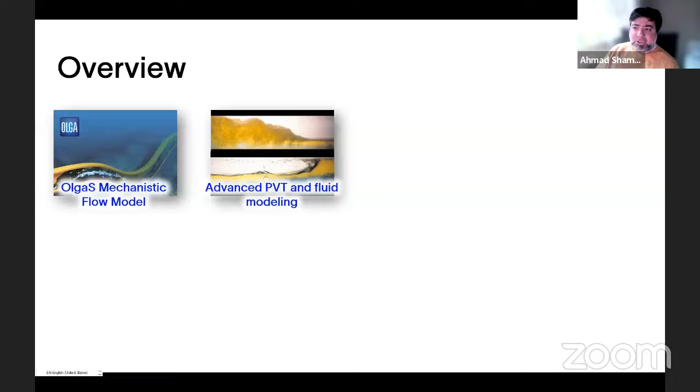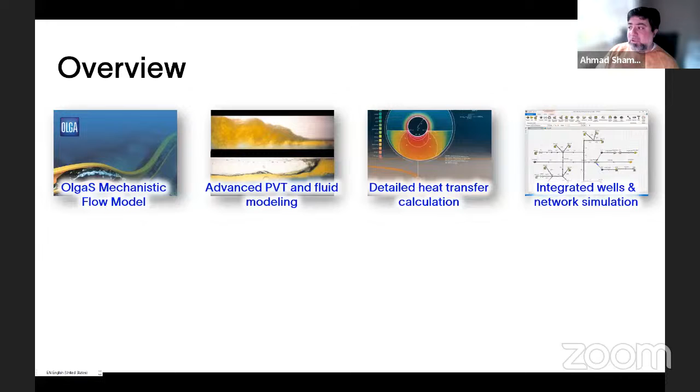Pipesim has the OLGA-S mechanistic flow model, which is the industry standard flow model for modeling multiphase flow today. It has advanced PVT and fluid modeling capabilities, including integration with Multiflash. SLB has a fluid package from our process simulator, which is Symmetry. Pipesim offers detailed heat transfer calculations in pipelines as well as in the wells. We have integrated wells and network models, and I will have a slide talking about that.

And there is, I would say, a misconception about Pipesim, probably from the name. It starts with pipe. However, Pipesim is a complete solution for modeling the production system, starting from the sandface all the way to the gathering manifold, which means that it is very powerful for modeling wells with all their granularities, design, optimization, etc. And today's presentation, the advanced well editor for modeling smart well completions, is an extension of what we have done over the years for well modeling.

We have a unique feature, which is the integrated GIS pipeline profile, in which you can build the pipeline network automatically from a GIS, or Geographic Information Systems, shapefile, and then you can also visualize the results. I'll also talk about that in a moment. We have what we call network production optimization, and extensibility and automation.

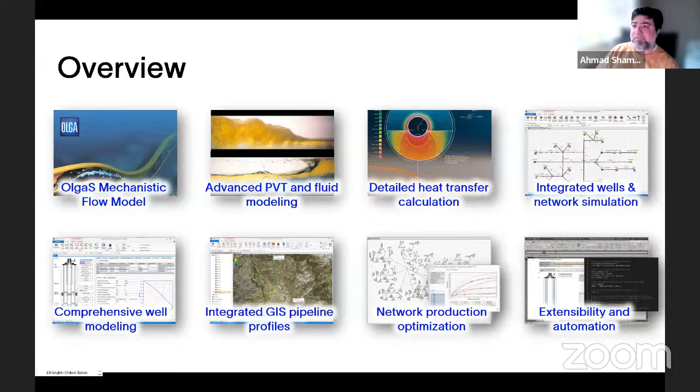Before I continue, I know that CO2 right now is a hot topic everywhere. I'd like to emphasize that Pipesim for modeling CO2 transport and injection is very powerful and reliable. We have recently compared Pipesim with experimental lab data. CO2 transport modeling in Pipesim is validated against this experimental data and found to provide highly accurate and reliable simulation results. The transition between the liquid and gas phase is handled using PH flash calculation. CO2 transport is carried out using the most reliable flow model in the industry, which is OLGA-S.

And if you're familiar with OLGA, there is an ongoing joint industry project that has been funded by several clients around the world to validate and prove CO2 transport modeling in OLGA. Every time we have a new version of OLGA-S, we will incorporate it into Pipesim, which means that Pipesim will always get the most accurate flow modeling capabilities from OLGA. For PVT modeling, Pipesim incorporates the best equations of state for modeling CO2, including CSMA, GERG, and others.

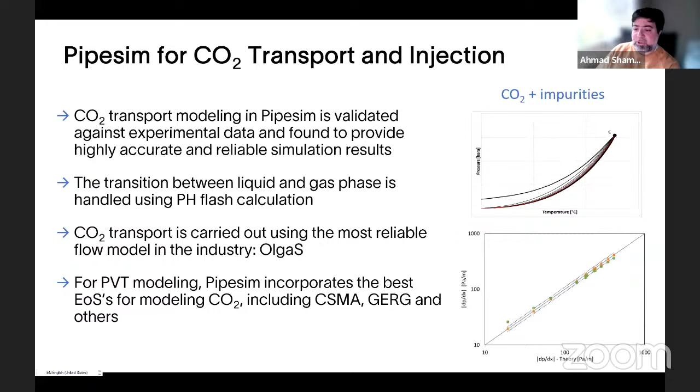When it comes to integrated wells and network modeling, you don't need separate software for modeling the wells and another software for modeling the network. In my opinion, this is a big advantage, because having one software for the wells and another for the network could result in silos between teams. Whereas when you have one integrated model, it can be shared, and in a shared environment you can open the network, update the model within the same network, and everybody can utilize the latest updated models with all the well data.

And more importantly, the simulation solves the integrated model starting from the reservoir boundary conditions all the way to the gathering manifold.

So you don't need to create lift curves in between to basically account for the pressure drop in the well. So the iteration is happening with all its accuracy from the reservoir all the way to the gathering manifold, including the well, even if the well has artificial lift or any restrictions, and so forth.

Simple model management and relatively small file size. You can have a model of 500 wells with all its pipelines, and the size is maybe 200 megabytes. And you can easily navigate from the network perspective to the well perspective by click of a button. There is a button here called perspective. As you can see, this is W for a well. You just flip it and you go to the network, and then the entire network model with all the wells will be saved in that file.

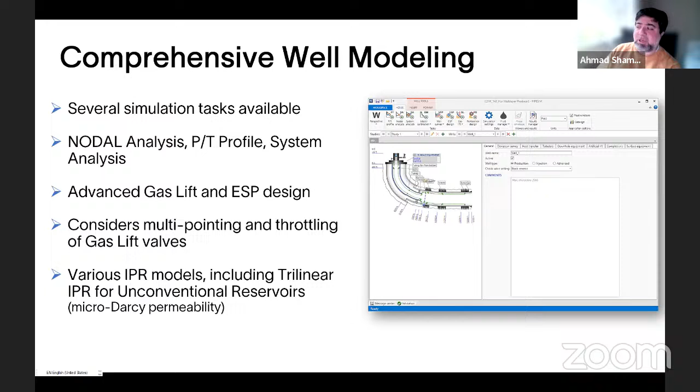Advanced gas lift and ESP design. You can completely design an ESP system or a gas lift system with all the valves. Of course, there are integrated catalogs, and you can add your own valves or pumps. It considers multi-pointing and throttling for the gas lift valves, and there are various IPR models, including trilinear IPR for unconventional reservoirs. Of course, all the standard IPR models, such as horizontal, Joshi, Vogel, all the gas IPRs, and of course the productivity index are already there in Pipesim.

So for the GIS integration, as you can see from the picture here, if you have the network, you can easily, by using the color coding of the results, identify issues and problems. For example, where is the lowest velocity ratio to look for corrosion? Where is the highest corrosion rate? Where is the maximum erosion? And where is, let's say, the highest pressure, etc. So this is, I would say, for large networks an excellent feature.

And of course, you can import a shapefile. For people who are a little bit familiar with GIS, when you go to any GIS system, the map that you see is actually composed of multiple layers, and each layer is a shapefile. So, for example, when you go to Google Maps and look into the 3D map or the actual map, not the topographical map, when you zoom in, you start seeing more data, right? And this data is actually the shapefiles. So pipelines are also stored using shapefiles.

So for mapping purposes, if you have any GIS team in your company, you can ask them to give you the shapefile for the pipelines, and you can just import it to Pipesim and build your pipeline network automatically. And of course, you can digitize on the pipeline path to build the pipeline network, and the length and the pipeline profiles would also be calculated automatically.

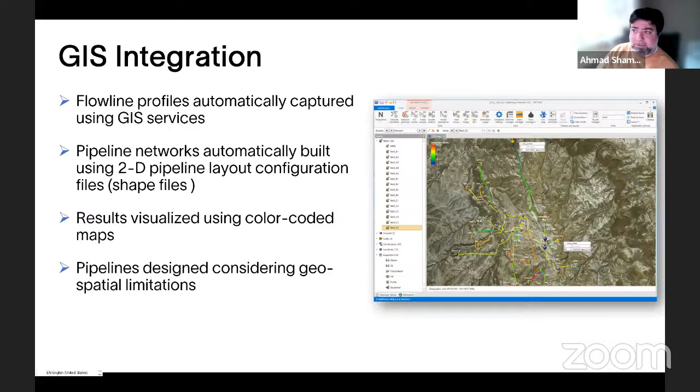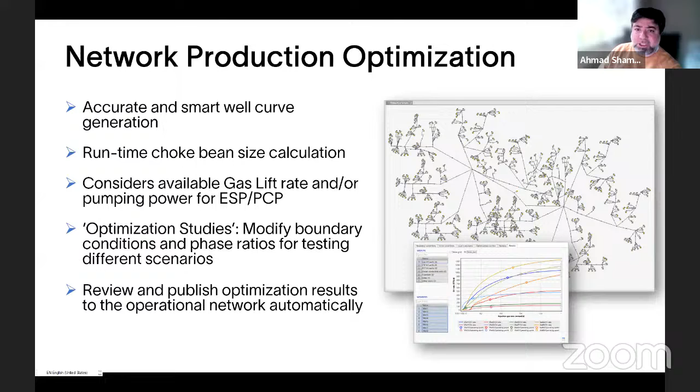And then we have finally the network optimization when it comes to the core features, in which it will automatically calculate for you the distribution of the gas lift system, for example, gas lift rates per well, the distribution of the ESP frequencies or the choke settings to maximize production and of course honor the constraints.

If you like scripting, you can actually interact with the models without really opening the user interface. So with the Python toolkit, you can build and update models using Python scripting without opening the UI. This, of course, helps you to run batch simulations and analyze the results. And it is suitable for all users with basic Python experience. So you don't really need to be, I would say, a big developer or something.

And also we have other extensibility and automation frameworks. We have a cloud native engine service API. This is what we use in what we call Delfi in SLB, which is our cloud answer. And we have a C++ API that enables linking Pipesim with third-party applications such as process simulation.

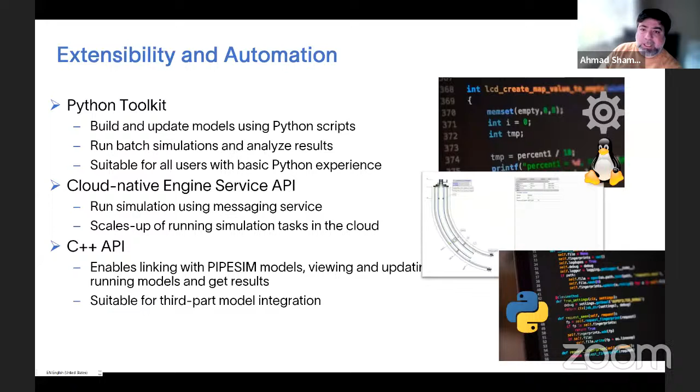Okay. So now, what are the latest features that we have implemented this year? So the big thing is really the new tab, which is the advanced well, and I will focus on this a little bit.

We are also enabling modeling flow control valves along the completions. We have a new GIS map background, and we have enabled the phase ratio override on multi-flash files.

So the advanced well. The advanced well is really a new revolutionary concept in modeling wells. I don't believe there is any other competitor that can do this today. The reason is because we are breaking down the well into nodes and branches and utilize the network engine solver.

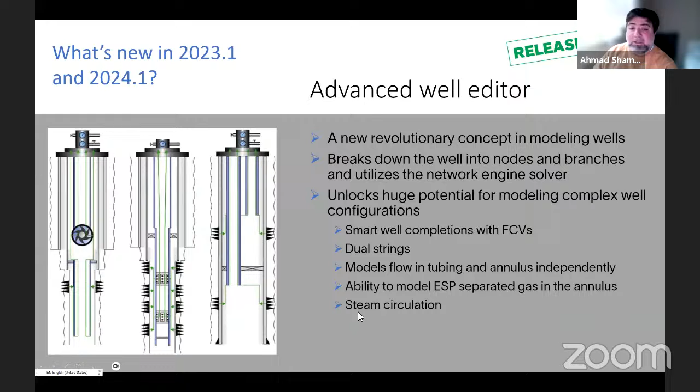So this unlocks huge potential for modeling complex well configurations, such as smart well completions with flow control valve, dual strings, modeling the flow in tubing and annulus independently, ability to model the ESP separated gas in the annulus, and also it's used for steam circulation. What is the motivation? Why did we do this?

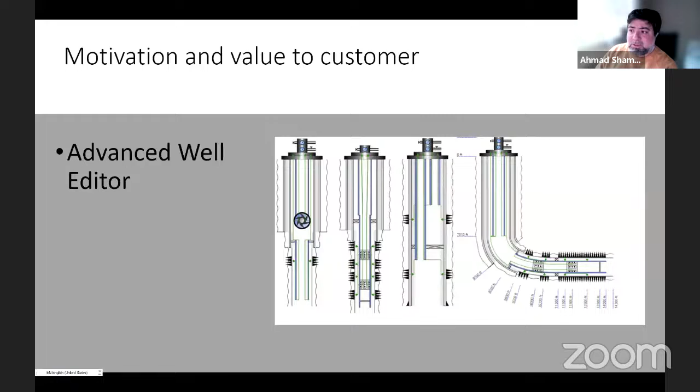Okay, so to deep dive a little bit more on what is actually the advanced well. If you're familiar with Pipesim, this is a well cross section for a well, right? In Pipesim, of course, you can model multi-layer. However, each layer has to be exactly on the same depth of a sleeve. And the sleeve really is not a mechanical sleeve. It's just to open the flow path in front of the completion.

In Pipesim, the well canvas traditionally is considered, and it must be a single branch, meaning this is a single branch from bottom up, or for injection from top to bottom. And as I said, even if I have multi-layer, this multi-layer is not really another flow path. It will add to the same single flow path.

If you're familiar with Pipesim, the moment you move the completion a little bit up or down, or you move the sleeve up or down, Pipesim will give you a warning that I cannot solve this, because then it becomes basically a commingled flow, right? And in Pipesim, we have two separate engines, right?

In fact, behind, what you don't see is that there are two completely separate engines for solving the tasks. For the wells, we have what we call the single branch engine, right? And it handles all the tasks related to the well: nodal analysis, PT profile, system analysis. All that is really a single branch engine, right?

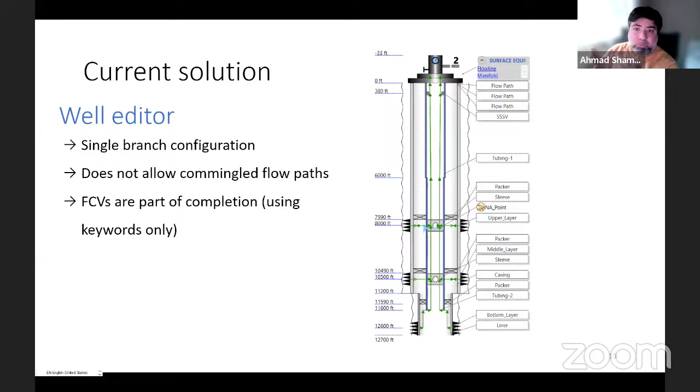It was available in Pipesim Classic, but then you can only have the flow control valve as part of the completion. It just adds pressure drop to the completion. So it's not really an actual flow control valve as we wanted it to be, right? Because the flow control valve by itself can be placed anywhere along the tubing, and the flow can go into the annulus and so on and so forth. So this well editor was limited, okay?

And we have, of course, the network editor. So some clients have used the network editor to model smart well completions. Like in this case, for example, we have a well that was developed using the network editor. This is the tubing, and then we have a flow control valve here. It's a choke actually, and then we have a lateral here.

And you can of course do that, but it is still the network editor. So it can be used manually to construct some advanced well configurations. However, it's not suitable for all the well configurations. And the problem also is that suppose you need to model an ESP, or you need to model gas lift, it's going really to be a hassle, right?

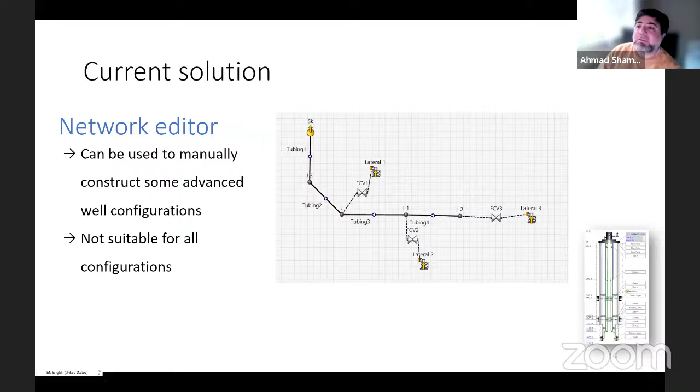So this is what we have been working on in the past 2 years. It's the new solution, the advanced well editor, where the well components are converted into an equivalent network automatically, and the network solver is used to simulate the network system. This opens doors to simulate various advanced well scenarios, such as dual string, steam circulation, smart well completion with flow control valves, and modeling of ESP separated gas in the annulus.

So for smart well completions, this is released already now. It's been released since last September.

This is a cross-section for a well with flow control valves, and I will show you a demo today, right? As you can see here, we have a horizontal well, and we have a flow control valve here. In this horizontal well, Pipesim recognized that there is a flow control valve, which means it breaks down the completion at this point automatically, and then the network that will be constructed is basically going to create a node here.

So the completion will be broken down here, and then the flow will come from the bottom to this node, and then from the top to this node, or from the right and from the left to this node. This is how the network is solved. Then the pressure drop across this flow control valve is calculated.

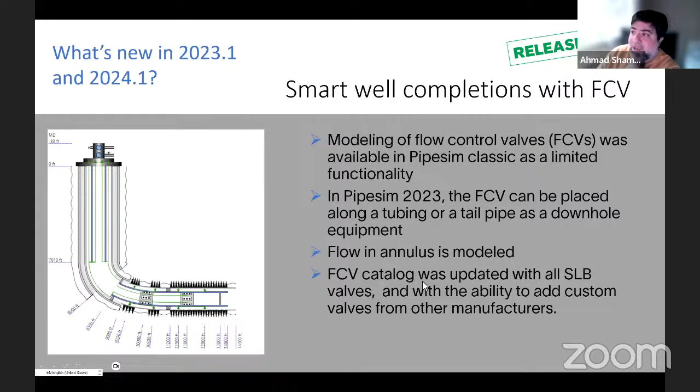So the supported scenarios: you can use the flow control valve concept for well design with user-defined or catalog equipment. You can use it for production or injection into separate zones with existing flow control valve settings. You can search for the optimum flow control valve position using the rate limit. So you can put a limit on a maximum liquid rate, maximum gas rate, maximum water rate, or maximum mass rate, and automatically the engine will tell you what the required position is, right?

Remember, this is not going to find the optimum. You just put a limit, and the limit can be on any of the valves, and then automatically the engine, based on the hydraulics and the inflow coming from each completion, is going to calculate the required opening, or the required area or equivalent area along the flow control valve.

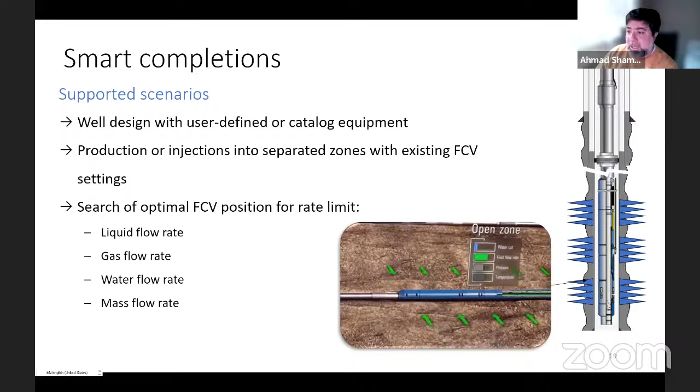So this is just to explain more how we're constructing the network, right? The same network as before, I just converted into vertical using the format, right? But you will see that we have this completion at the bottom. We have a flow control valve here. These are two single point completions. So this is a distributed completion, and these are two single point completions, okay?

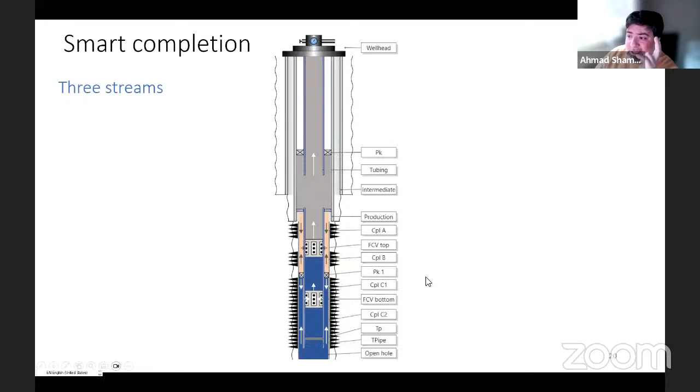You will notice that we actually have three streams, okay? So we have the flow stream in the upper zone, from this completion to the flow control valve, from this bottom completion going up to the control valve, and then across the flow control valve. And we also have this bottom zone, which is a horizontal completion. It is actually split in this location, and then the flow in the annulus is also calculated.

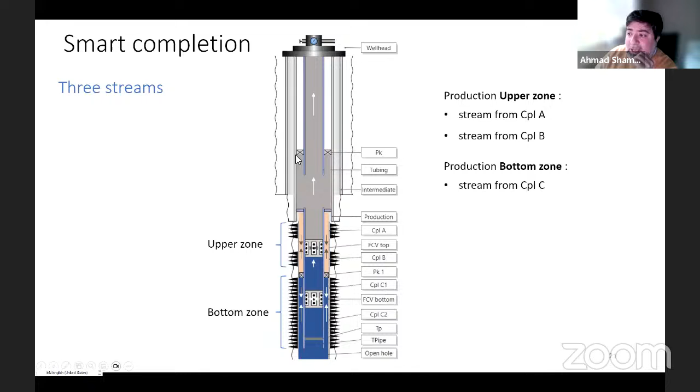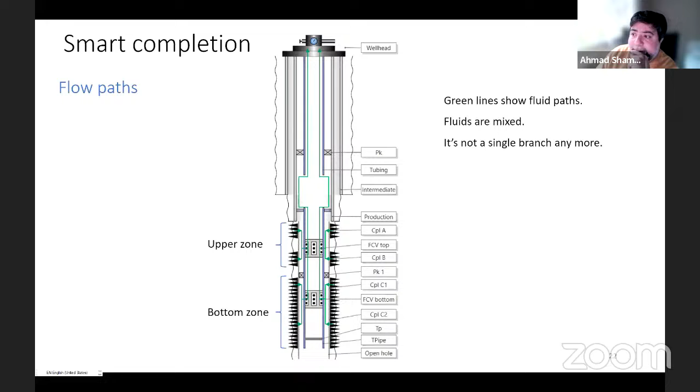So it is just backward. So it's just going to restrict. That's why it is maximum, right? So this is just to be clear in this specific scenario. So this is it when it comes to the smart well completions and flow control valve. As I said, I will make a demo, but let me just show you two or three more features that we have added recently. So in 2023, we have added the phase ratio override using Multiflash PVT files. This was not available before, but some clients requested that, so this is now available.

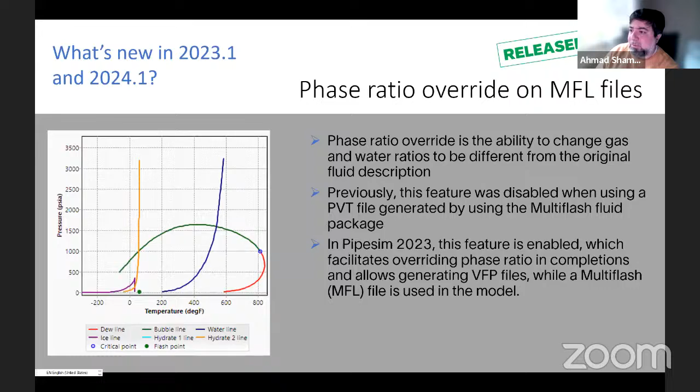We have also added a new GIS map background, solid colored, right? Some clients said, okay, I like this GIS map. However, sometimes the earth features are making the color coding not very clear. So it's better that I switch into a solid color, either dark, light, or white. We have added that.

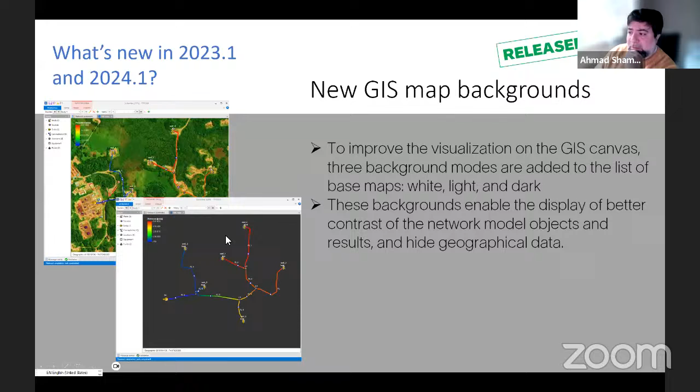And we have also added easy access to the simulation results file. So some clients are familiar with Pipesim Classic, that was 2012. If you use Pipesim Classic, once you make a run, it will create a bunch of simulation files. And these files used to be generated in the same directory that you store the model with, right? So in Pipesim, we don't have that. We have all the results in a comprehensive and powerful grid visualization and plot visualization inside the user interface. But some clients said, I am still interested in these classic files.

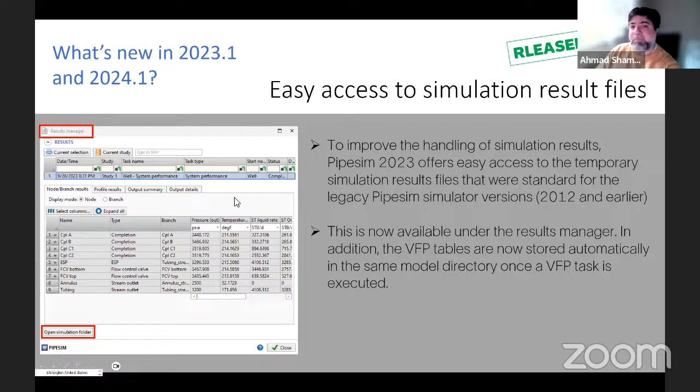So if you're also interested, you can go to the results manager, and there is a new button here called Open Simulation Folder. You will find these files. However, these files are temporary. So the moment you close the model, these files will be deleted. So if you want them, you can just copy them and put them in another directory.

We can have gas lift valve ports. We're not yet there to model the entire production gas lift injection valve system. If you're familiar with the injection valve system, it is a more sophisticated gas lift modeling capability to model valve status, whether it's open, closed, throttling. Here we're modeling gas lift valve ports, in which you specify yourself the injection rate in each valve, and then you can of course play with that manually to match whatever you are producing.

Of course, we will continue next year, Q1. We plan to implement the full injection valve system so that it will actually calculate how much you're injecting in each valve by just specifying the casing head pressure at the surface. Dual string configuration enables operators to produce from different zones with major variation in pressure and fluid types. Determine the gas lift split factor between the two strings utilizing the network engine solver.

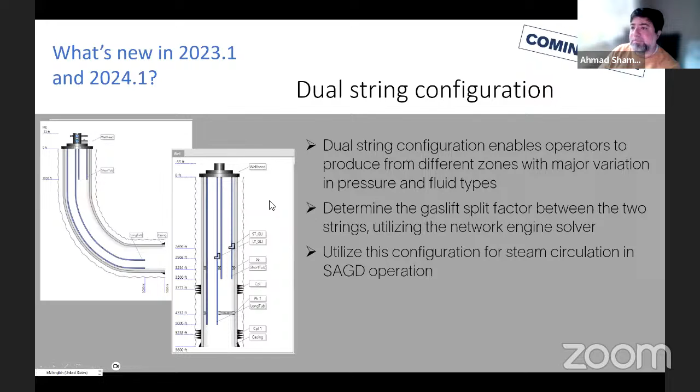Again, for dual string, you can produce from 2 or 3 separated zones, inject into 2 or 3 separate zones. Of course, the third is basically the annulus, if you want. Circulation, inject long, produce short, free flow and artificial lift, support ESP in one or both tubings, and gas lift single valve in one or both tubings.

With that, I'm done with my presentation. If there are any questions, please put them in the chat. Otherwise, I'll start showing you a demo. Okay.

So I'm opening now 2023.1, the official release that was released last September. Just for the people who are new to Pipesim, I will just quickly go over the well canvas only, right? So this is what you see when you open Pipesim. You have network and you have well, I can create a new well, right? So when I click on new well, this will just show you how easy I can build a well model, right?

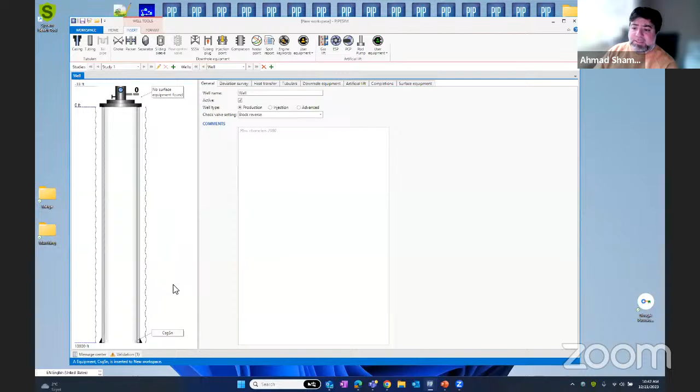Okay, so I'm going to add a casing just by drag and drop. I'll put a casing here. The casing by default goes to 10,000. So let me just make it, for example, 7,000. And the inside diameter, I will just put one casing. Of course, I can put multiple just to represent what's actual in the field. And this is used if I want to calculate the heat transfer.

But let me just put one casing that goes all the way to 7,000 feet, with inside diameter of 6 inches. And then I will put a tubing. This tubing goes all the way to, okay.

Shall we take questions now? Yes, no problem. So in case of dual string, is it available to do ESP with gas lift in the same string? No, that's not possible. Because, I mean, is this even practically possible to have gas lift and ESP in the same well? If there is a need, of course, we will make the effort to do it. However, we thought that this is not really very practical and not very common. There have been trials in the world, but this is not very common.

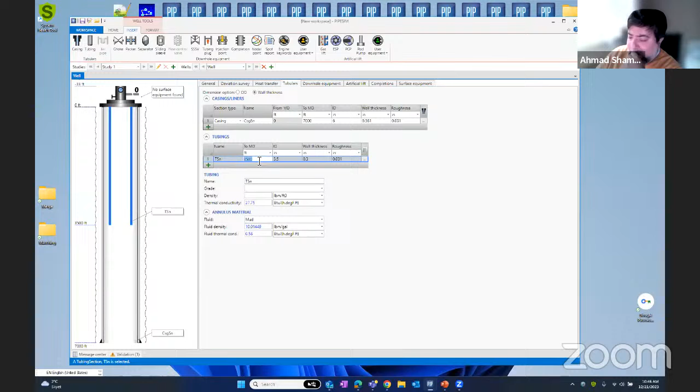So let me just show you quickly. So this is, let's say, 3.5, that goes all the way up to, for example, 6,000. And then I'm gonna put a packer. Then I will add a completion. So the completion here, I'm just going to use productivity index.

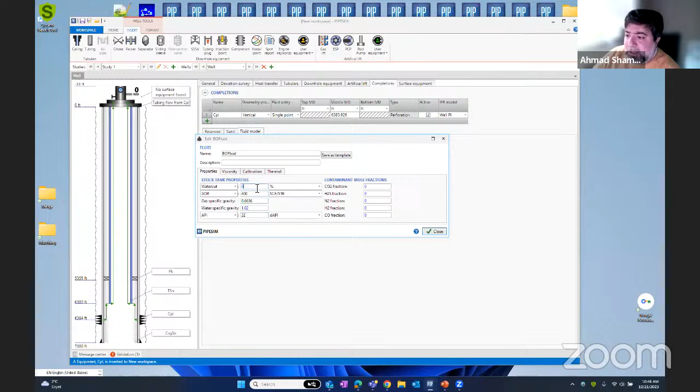I'll specify the completion pressure to be 2,500, 200 degrees temperature, productivity index say 5, and then I'm going to add one fluid, let's say black oil, specify the GOR of 400, and the API, let's say, is 32. And I'm done with my well. I can now perform analysis.

So my well now, as you can see here, the completion is at the depth of, let me just make it a good number, 6,500. So this is my completion. The completion is described by reservoir pressure 2,500, temperature in degrees Fahrenheit, and the productivity index of 5. We have added a fluid.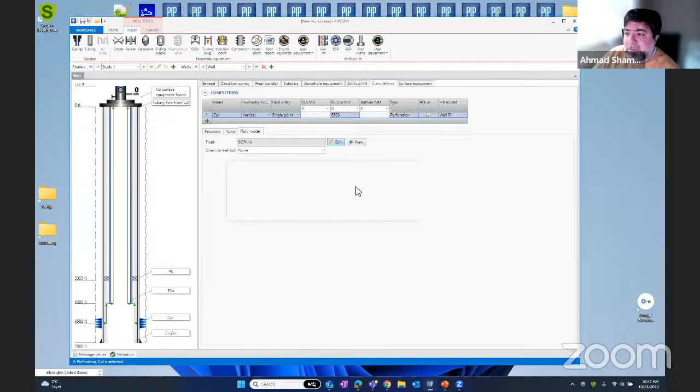The fluid is no water cut, GOR 400, gas specific gravity, I'll just put 0.8, for example. And then we have 32 API. So this is the fluid. This is my completion. And then we have a tubing. The tubing is at depth of 6,000 with an inside diameter of 3.5. And then that's it. This is the flow path.

Of course, I can add surface equipment. I can put a flow line, a choke, etc., or I can stop at my wellhead. Let's, for example, add a choke. I'm going to connect the choke with a connector. So the choke now is, let's say, fully open. Let's say 3 inches, and then I'm going to add a flow line until it goes to a sink.

So the flow line is, for example, 4 inches, and then the horizontal distance for this pipeline is, let's say, 100 feet or 500 feet, whatever. Now, as you can see here, there is a small square, which means that right now we have what we call the well stream outlet. So defining the well stream outlet is useful in the network.

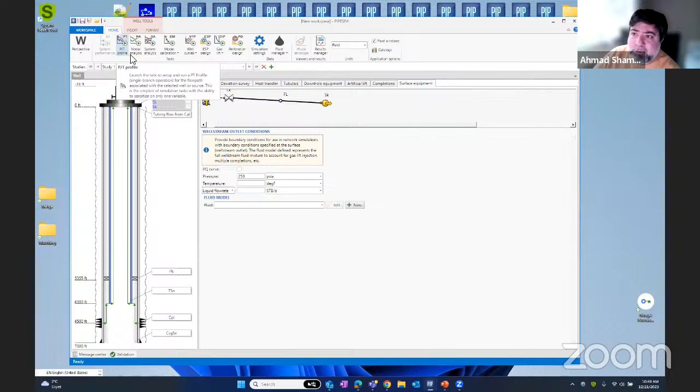So I can go and say, okay, I need to run what I call a PT profile. Let me just run nodal analysis. This is more, I would say, common. So nodal analysis, my node point is at the bottom hole. As you can see here, the nodal point is at the nodal analysis here. And then the branch ends at the flow line, which is where I specified my well stream outlet. This is the flow line, right? And then I can click on run.

So the flowing bottom hole pressure is basically, when you start flowing, the difference between the static reservoir pressure and the flowing, because there will always be a drawdown, and this drawdown is determined by how much PI we have, how much skin, and so on and so forth. For a flowing well, you will never have a flowing bottom hole pressure that equals the reservoir pressure if there is production. There has to be pressure drawdown, right? So this is the nodal analysis.

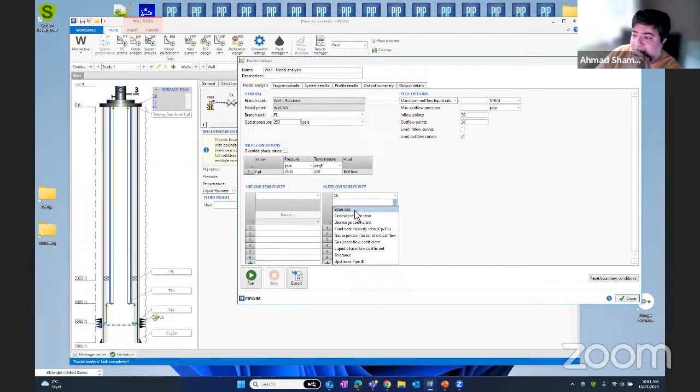Now, what I can do is say, okay, what is the impact of changing the choke settings on my production? So I can go to the outflow sensitivity, because now the choke is part of the outflow. I can click on the choke, and then I can put the bean size. Remember our choke was 3 inches, right? So I'm going to put 0.5, and then 1.5, and then 3. So this is sensitivity for the outflow.

So when I run, you will see now that the outflow will have 3 curves. Each is associated with a choke size. And then this will give you right away the production per case, okay? So as you can see here, the bean size of the choke is 0.5, and it gives you 1,300. This is for 1.5, and this is 3, okay?

And of course, I can put several inflow cases. For example, I will go to the completion, and I can change the productivity index. Let's say my productivity index was 5. So I'll put, for example, 1, 5, and 20.

Then I'm going to click run. And now you will see that I have 9 cases because I have 3 times 3. So this IPR here, the blue one, is associated with what? With a productivity index of 1. This is with productivity index of 5. This is with productivity index of 20. And now the outflow is associated with the different choke bean size. Okay. So as you can see here, I have 9 cases, and all of them are operating.

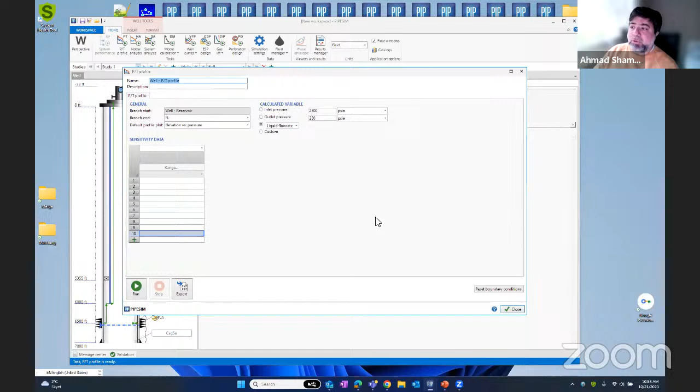Okay. Now this is the nodal analysis, and of course, as I mentioned, we have the PT profile. The good thing about PT is that when you run it, it's not nodal, meaning it's not CPU intensive, because nodal requires really more than probably 60 runs. To construct one IPR curve, you will need to sensitize on the rate and then calculate the bottom pressure for the inflow. And you also need to sensitize on the rates and calculate the bottom pressure for the outflow, then find the intersection. So it is, I would say, a heavy calculation.

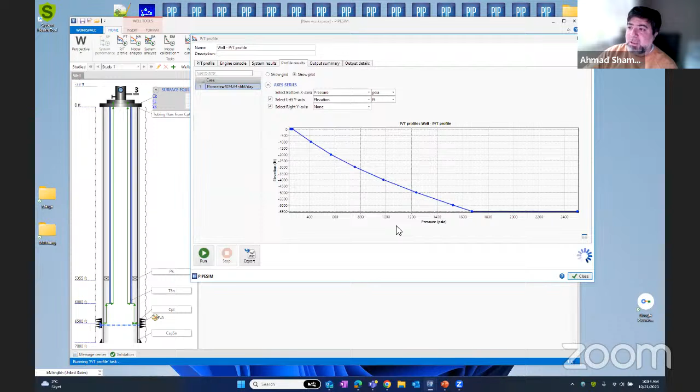The PT profile will just iterate on the same condition. Like, for example, when I run, it will immediately give you how much we're producing, right? And then I can also sensitize. But then, in addition to the sensitivity, you see the calculated variable here? This is a very powerful tool. So for the calculated variable, we are now calculating the liquid flow rate.

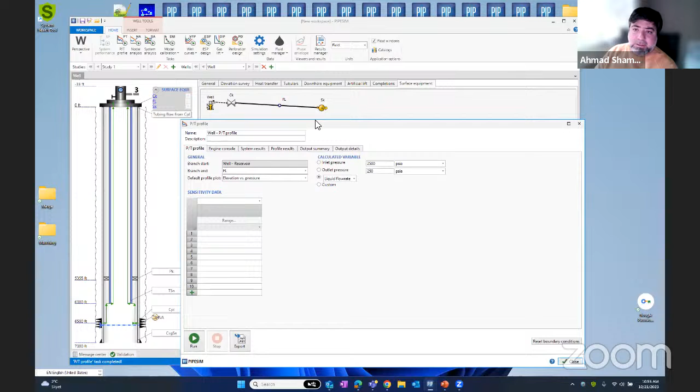Now, I want to calculate the wellhead pressure, the pressure at the well stream at the end of the flow line, if my rate was not 4,000, if my rate was, for example, 3,000, okay? So I can calculate the outlet pressure, and I will specify the rate. When I click run, this is the pressure, okay?

Better than this. If I want to calculate the choke bean size to give me a certain rate, I can do that directly without needing to do inflow outflow sensitivity and the nodal analysis. For example, I will tell them, okay, give me the choke bean size that will provide 3,000 barrels. The minimum value is, let's say, 0.5. The maximum value, of course, is 3. And direct, meaning as the choke bean size increases, the rate will increase.

So now when I click run, it immediately gave me the exact value of the choke bean size. So this choke bean size, if I take it and apply it in the well, I will get exactly 3,000. So let me just do that. It's 0.934. So now I'm going to go to my choke, 0.934. So go here, 0.934.

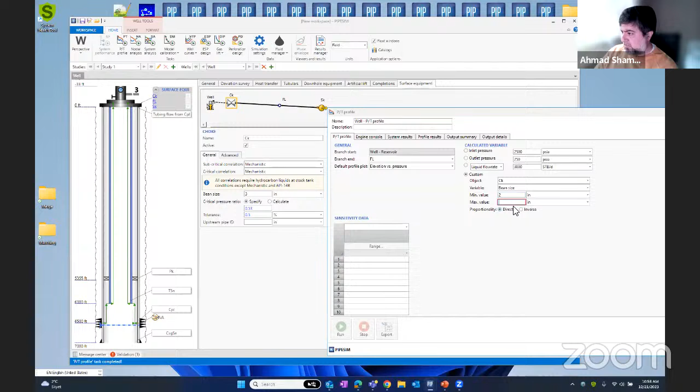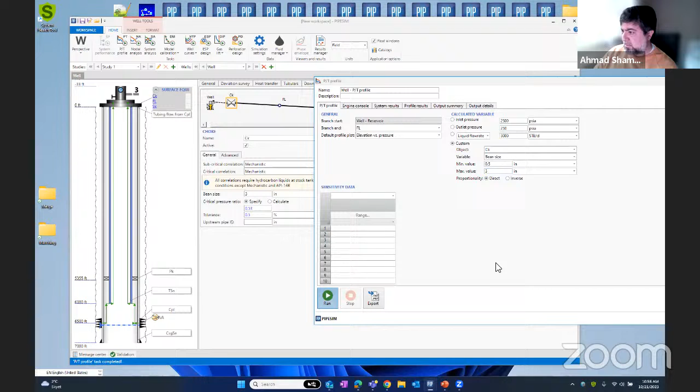Now I need to calculate the choke size. Let's start with 2. Maximum value is 3. Okay, we're ending here. Unconverged. Okay. Okay, 0.93. Let me see. I need to see what's happening here.

Why? So I'll go to sensitivity on the choke bean size, and then I say 0.5, 0.934, 2. Yes, what happened? So that's correct, 0.934. Now, if I go to the bean size and I put 0.934.

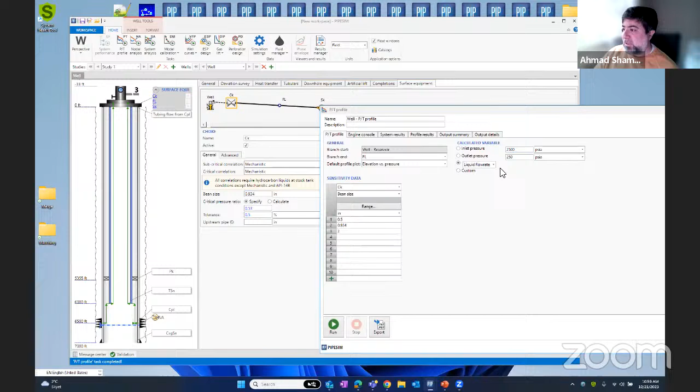Okay, now I know what happened. I was putting 0.394. So now calculate the liquid flow rate. Should give me 3,000, exactly. Okay, sorry for that hiccup.

Now, any question? Oh, thank you. You put it on the chat, on the chat. Thank you very much. So, any question before we start talking about the advanced well?

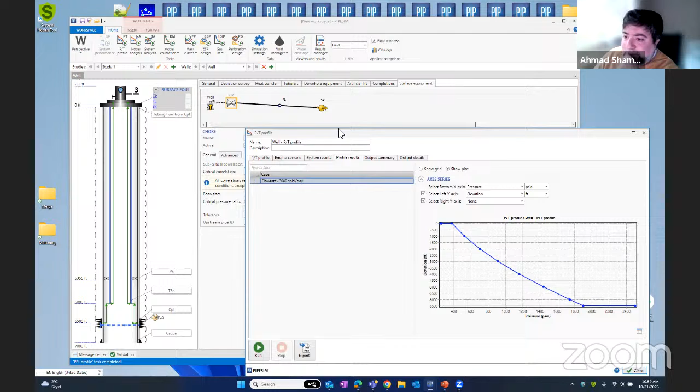Okay. Now, let me open one of the existing examples. So I will go to help, case studies, and then I'm going to well models. There is an example here called, let's say, horizontal multi-layer producer, okay? And now I'll try to explain to you the main difference. So right now, you will notice that we can have multiple completions.

And I can simply go to the PT profile, I can run it, it will tell me basically how much each completion is producing. I can simply go to the grid. I can look into each of the completions, and I can see how much each completion is producing. So this is the production per completion. Okay. Now, what is the limitation for the current conventional well? The moment the user interface recognizes that there is any commingled flow, it will stop.

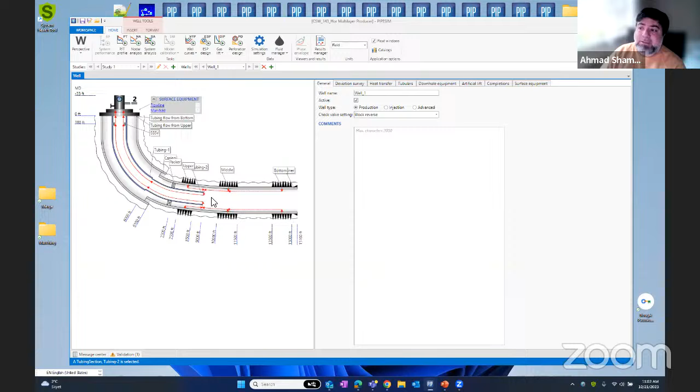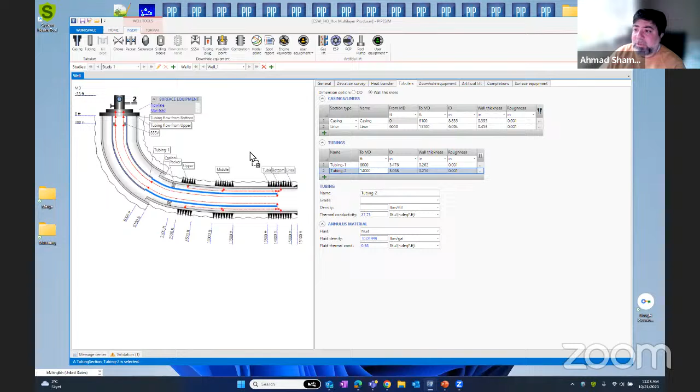Okay. Then we said, now we need to solve this issue. So, what if instead of only that tubing, I extend the tubing to go all the way up to maybe 14,000. And now, not only this, I'm going to put a tubing plug at the end of this tubing. And now I need to open flow control valves.

So this is only available, as you can see here, not for the conventional well. You go to the advanced well, and now I have new equipment. So I can simply go and place my control valve here, and then I can specify the equivalent choke area.

So if I'm using a generic valve, I can specify either the equivalent choke area, or I can use the port diameter and number of ports. So if, for example, you have a valve that has certain ports, you can specify the port diameter and the number of ports, or you can have the equivalent choke area. For example, let me use an equivalent choke area of 0.1 square inches. Now I have one flow control valve here. I will put another flow control valve there.

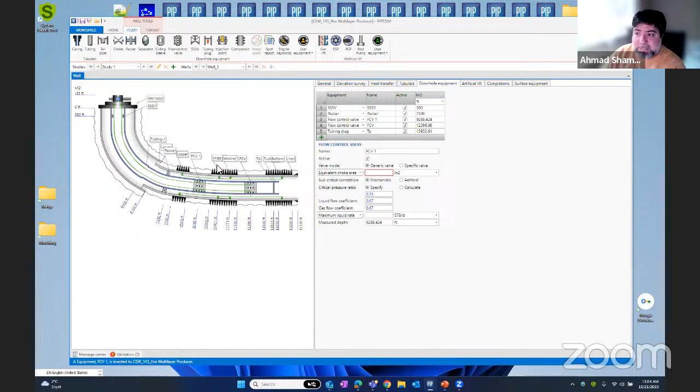And as you can see here, look, this is the beauty or the strength of Pipesim. This is a horizontal well, okay? This is a horizontal completion at the top. It recognized that the whole flow coming from this completion must go down, because there is no other way to flow. This completion here in the middle actually has two possibilities. It can go to the upper flow control valve or the lower control valve, and that's why it is split in the middle. It's not actually in the middle, it's in the ratio between the depths.

So you will notice now, if I put the format vertical, you will see that I have this completion here. It used to be called middle, right? But now you will see that it's called middle 1, middle 2. It is split, and it will create a node here. And then the flow across the annulus is going to be calculated, right?

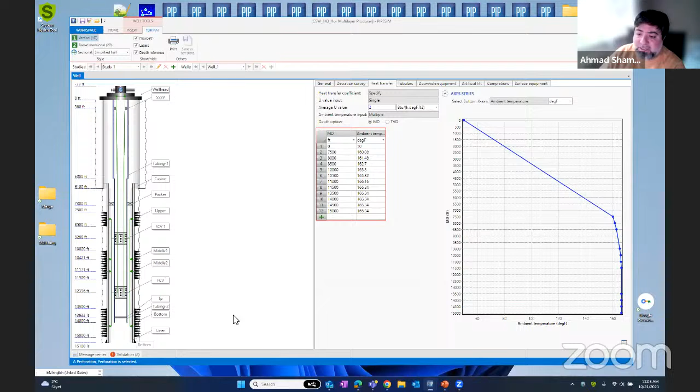Now I found a validation. Let me see what the validation is. So I have two validations. Number one, the geothermal survey. In the advanced well, you have to cover all the equipment, so the maximum must be 15,100. So I'll just put 15,100. I removed one validation. Another validation: apparently, I did not enter the equivalent choke area for the second one. So the bottom one is 0.1, and the second one, let's say, 0.2, for example. I'm going to use a specific valve in a moment.

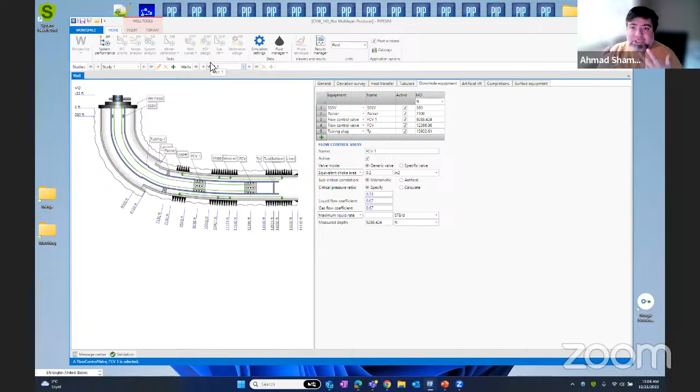So now, what do we have? This is a horizontal completion. Of course, I'm showing it as vertical, but I can go again and make it like that. And now, if I go to home, if you're familiar with Pipesim, we used to have all these tasks, right? But now, since this is not a single branch anymore, it is actually a network, we cannot run these tasks. The engine will not accept it. So we have created a new task. We call it system performance.

The system performance, when I click on it, the look and feel is very similar to the network simulation task. But you will see now that I have multiple completions, and then I have a stream outlet, which is basically at the flow line. Even the icon is different. You will see that the icon now, depending on the open flow paths, has a T that says tubing.

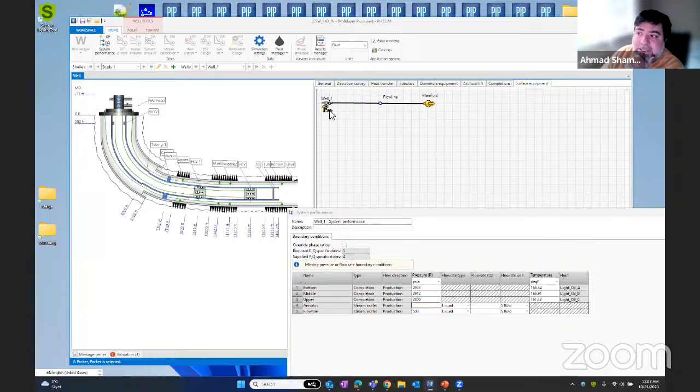If I deactivate this packer to open the flow path in the annulus, you will see that when I go to the surface equipment, I now have two ports: one port for the tubing and another port for the annulus. Not only this, look at this description here. I have a tab for the tubing and another tab for the annulus. I can have a different pressure for the annulus, and it is going to be solved. Okay, but let's delay that for the time being. So I'm going to go back to my packer and make it enabled so that I close the flow path in the annulus.

I am here in my system performance. Now I will click run. It's now running the network simulation engine. It's using the network simulation engine.

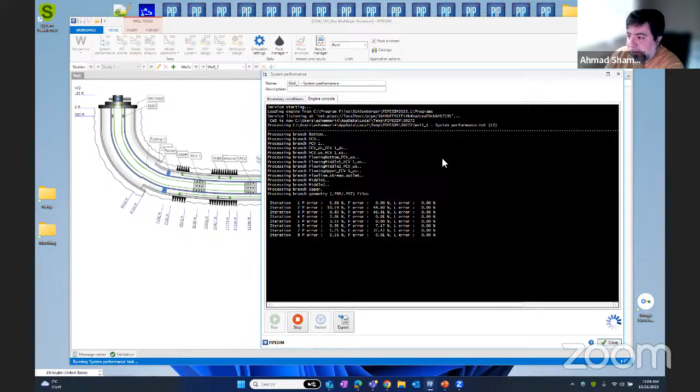Converged. So let me just try to do one thing. To describe what we have now, I will just make it 1D. So yeah, 1D, and then I'm going to bring this to the side. So let's analyze the results. What do we have here?

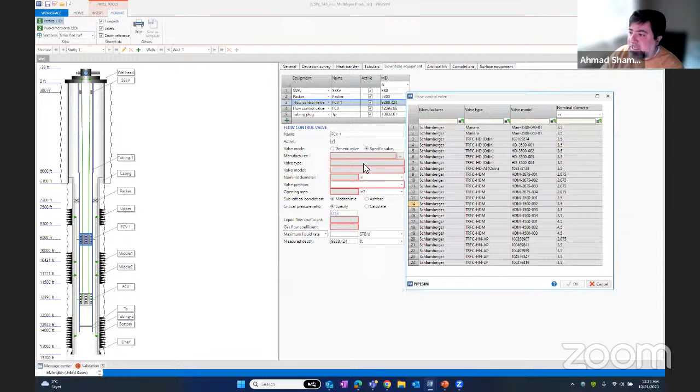How to isolate between the 3 zones without inflatable packer? I mean, if you want to put a packer, right? You can easily, let me just add the valve and then get back to you. So I will put a valve, let's say this valve here, okay? And now automatically it is fully open, which is position number 7, right?

So just to answer the question, if you want to add a packer, you can simply drag and drop a packer anywhere, and then it will recognize that. So you can isolate the zones anywhere. You can put the packer at the bottom here so that those two are going to the upper flow control valve and this goes to the bottom flow control valve. Okay. So now I have changed this flow control valve, and you see the position here tells you how much is the opening area.

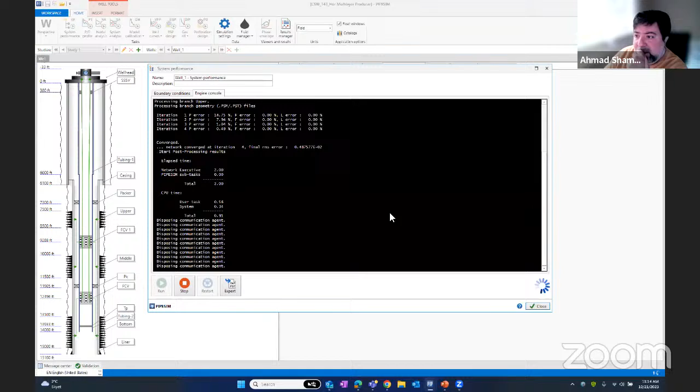So let us see now if we do this, how the production will change. I go again back to my system performance. Remember now that I have changed the configuration a little bit. I put a packer here, so I have isolated the bottom layer to be part of this flow control valve only. So I'm going to run again. We are converged. Again, I can go to the node branch results. This is flow control valve number 1. We're producing 9,000 across this valve.

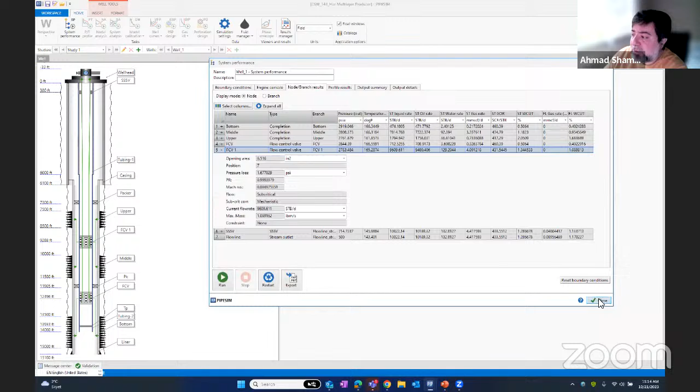Okay. So I need to restrict that. I need now to calculate how much opening is required so that I do not produce more than, say, 5,000 only. So I'll go to this valve, which is number 1. Let me close this one. This valve is still selected. And I'm going to put the maximum flow rate of 5,000. And then I would like to know what is the required opening associated with this. So click on system performance again, run this again.

And now I go to the node branch results. I go to the valve. We are less than 5,000, the position is 4. Okay. So you go and apply this in the field.

Another scenario, suppose that I have this completion here. I go to the fluid model, and then I have high water cut coming from this completion. Or to be more realistic, let's go to the bottom completion and we have high water cut. Let's say, for example, the water cut here is 30%. Okay.

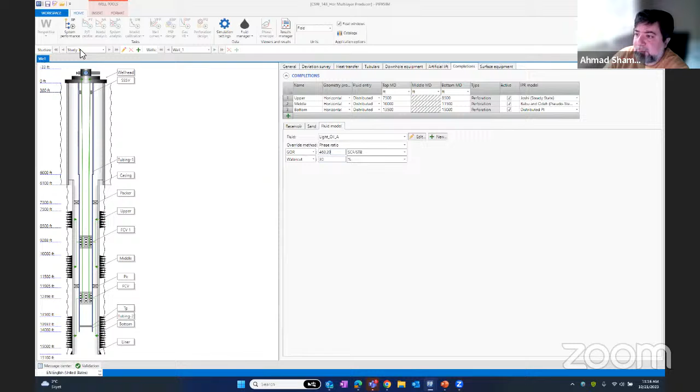Now, when I run, just make sure that it was, yeah. Okay. So when I run, of course, this will affect my production.

And I will go to my node branch results. And then I'm seeing that across the bottom flow control valve, how much am I producing in terms of water? I'm producing 544 barrels of water. Okay. So this was significantly reduced now.

So now, let me see how much I'm producing at the surface. Oil is 5,800. Okay. So now I want to restrict the bottom valve, the bottom completion, not to produce this amount of water. So I'm going to go to this flow control valve, which is now allowing 544 of water.

I will go now there and I will tell him, no, I want you to allow only 300 barrels of water. Okay. Now it is going to calculate for me a new equivalent choke area. So now I click system performance again, run.

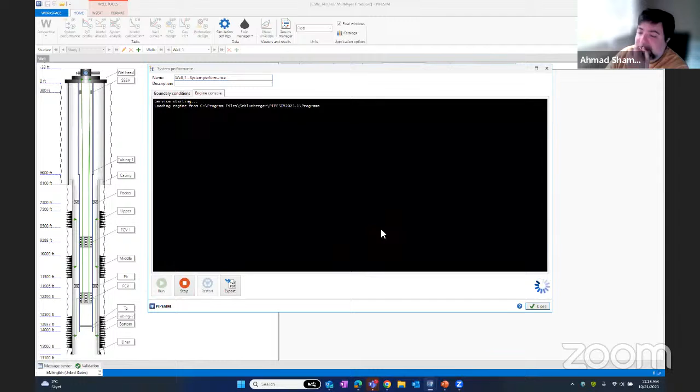Now imagine we're having a challenging case because now we're putting two restrictions on the two valves. So each valve has its own restriction. Now I go to my node branch results, okay? I would go to the bottom one, sorry. So now it has 300 exactly because I am not calculating a step. I'm calculating an exact opening area, okay?

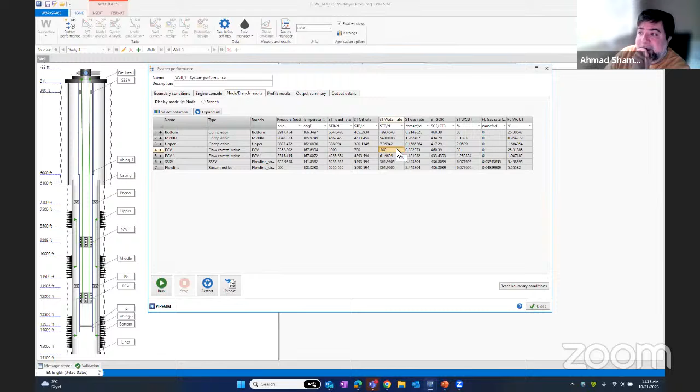So now I managed to restrict this flow control valve not to allow more than 300 barrels per day. And of course, the scenarios can be different. Let me just show you different scenarios, different cases. Like for example, open here. Just a second, please. Go to my folder.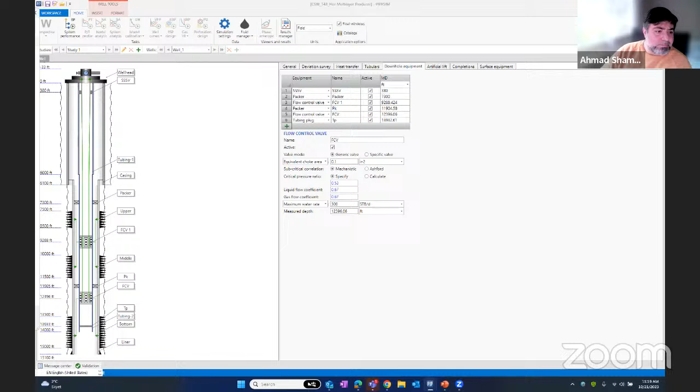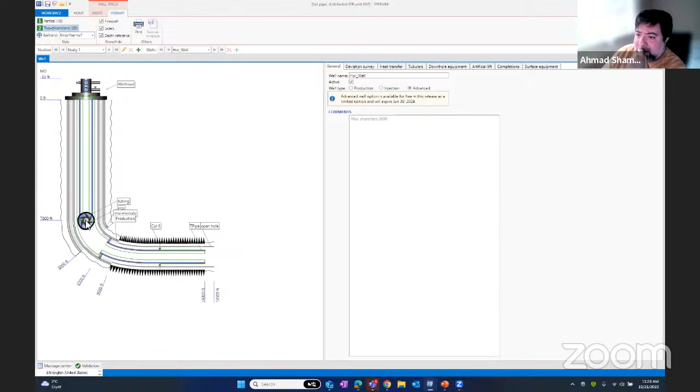So look into this case. This is a horizontal well where we are forcing the flow to go to the bottom, and then it goes through this tailpipe. Then we have an ESP. This ESP has a gas separator that is separating 100% of the gas. But where does the gas go? It goes into the annulus, right?

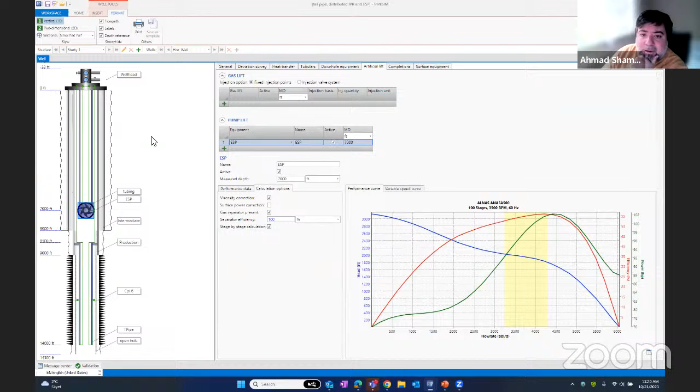Now, if I go to the surface equipment, we don't have surface equipment. So we have tubing head pressure of 400 psi. The annulus is 1,500. Okay. Now, when I run my system performance, I'm going now to model. You will see now what is happening. Let me just explain to you this beautiful graph here. So let me just make it like that.

So what do we have here? This is the pressure drop across this completion here. We consider that this is the highest pressure, right? So this is the pressure drop across the completion. Then this is the pressure drop in the annulus until it goes to the tailpipe. Then this is the green one, the tailpipe bottom to the tailpipe top.

Then we have the orange line, which is from the tailpipe top to the tubing bottom. Then we have reached the tubing. The tubing includes an ESP. So there is a jump in the pressure. Then this is the flow going inside the tubing. The wellhead pressure is 400. This is the pressure drop in the annulus.

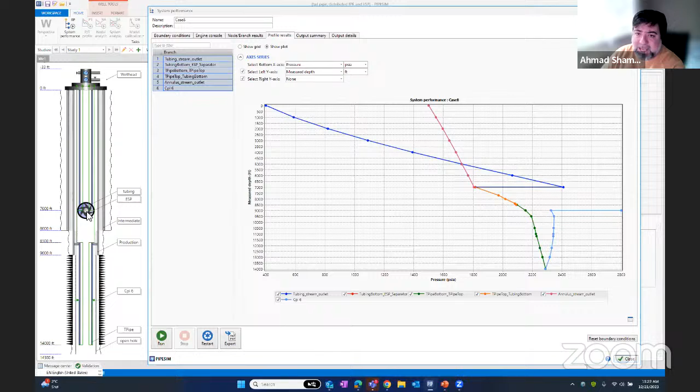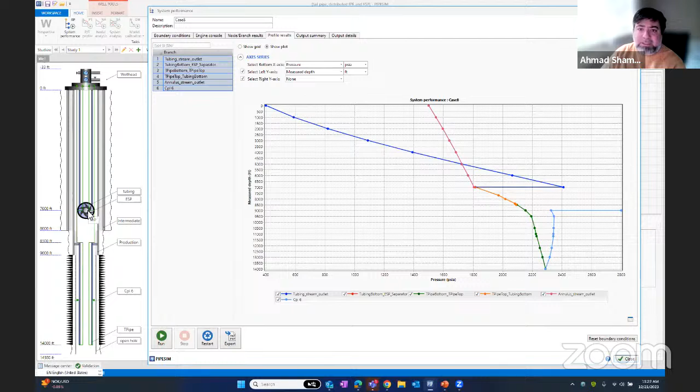Now, it is important to mention that, in the network solver, the separator always creates discontinuity in the production, meaning this stream is calculated backwards. Because the separated gas will be simply injected into that branch, which is the annulus, and we cannot specify the pressure and the rate in the inlet, so we specify the rate in the inlet and the pressure at the outlet.

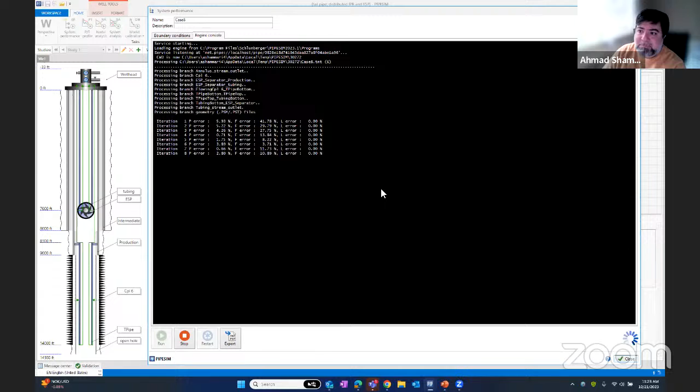So now it back calculates, meaning if I change that pressure to be, for example, 1,200, it will solve, but you will see that it is discontinuous, meaning the pressure across it is just calculated.

So this is one of the limitations on modeling the separator, because basically the problem with the separator is that it is one node, but then two streams are coming out of it, right? So we cannot put the same pressure on this node, okay? That's why the way we do it is that we solve it backwards for the separated branch only.

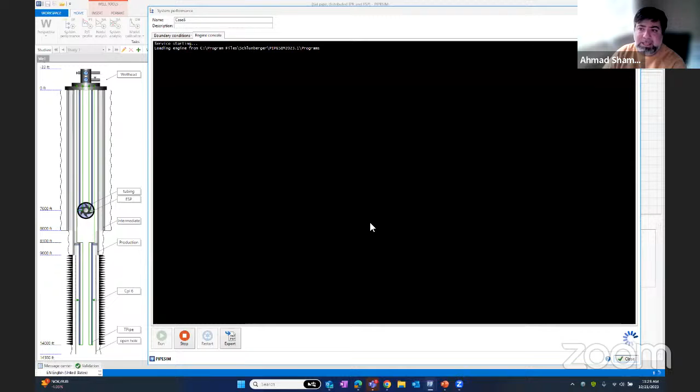But then, using manual iteration, we figured out that the best pressure to represent the annulus at the end of the annulus is 1,500. And we did that before, so that it actually represents the pressure at the inlet of the ESP, because the separator, as you know, must be before the ESP.

Okay. And of course, if I go to the grid, I can see the numbers. So I can look into each of the branches. So this is the annulus stream outlet. This represents the gas, the separated gas. This represents the production in the tailpipe. This is the branch of the tailpipe top to tailpipe bottom, and so on and so forth.

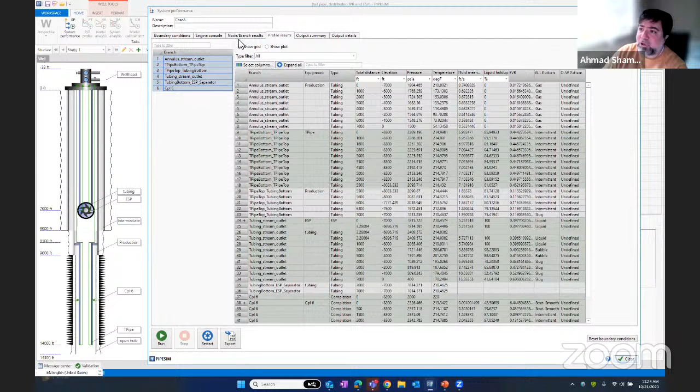So these are the different branches. And of course, you can go to the nodes, and then you can see the completion, the ESP, all the results, and so on and so forth. Tubing and annulus.

I think I have been speaking too much. I've been talking for more than 1 hour, 15 minutes. Didn't feel the time. So let us see if we have any more questions.

Okay. I was about to ask this question, but you already mentioned the sizing. In case you have layers of different rock and fluid properties, as well as pressure, how to ensure having the same PWF for the sake of avoiding a thief zone while producing?

Well, that needs to be done iteratively. There is no restriction on specifying the pressure, let's put it this way. It's only the rate. But then you need to solve and analyze, because it happens that the network will show you that the flow will go from one zone to another, and this is also one of the strengths of using the network solver to do that.

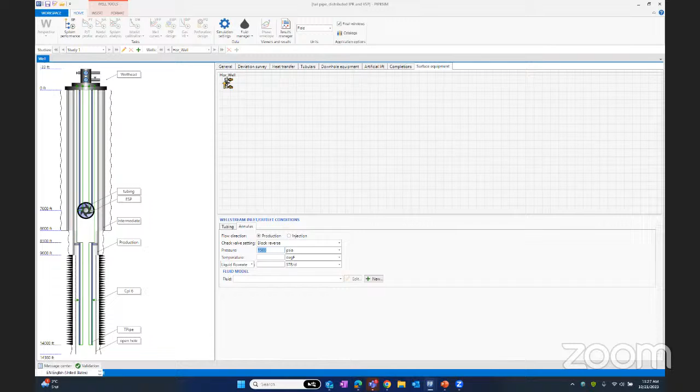Thank you, Abdul. Okay, flow control valve similar to inflow control valve. Yes, the tool is equipment for the function of water cut. It is suitable, basically, the flow control valve or the inflow control valve.

Okay, I need to distinguish between inflow control device and inflow control valve. ICD is different from flow control valve. Flow control valve is similar to ICV, not ICD, because the ICD, the inflow control device, is pre-designed and you cannot change the valve position. Whereas with the ICV, or flow control valve, you can control the opening from the surface. It's like a choke, right? So you can release it, open it, etc.

So you can use it to, for example, reduce the water production for a certain zone and so on. And of course, for the case of multilaterals, you can also use flow control valves to control production from each lateral. Sure.